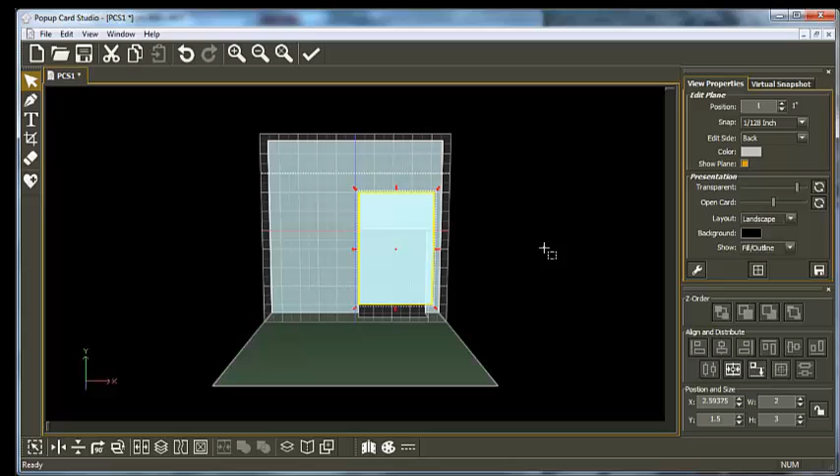Now what I want to do is give it some shaping at the top and some shaping at the bottom. So the best thing I thought to do was the trusty old brackets.

So I'm using the Times New Roman, and I'm using the bracket, which is just beside the P at the capital. And I go add.

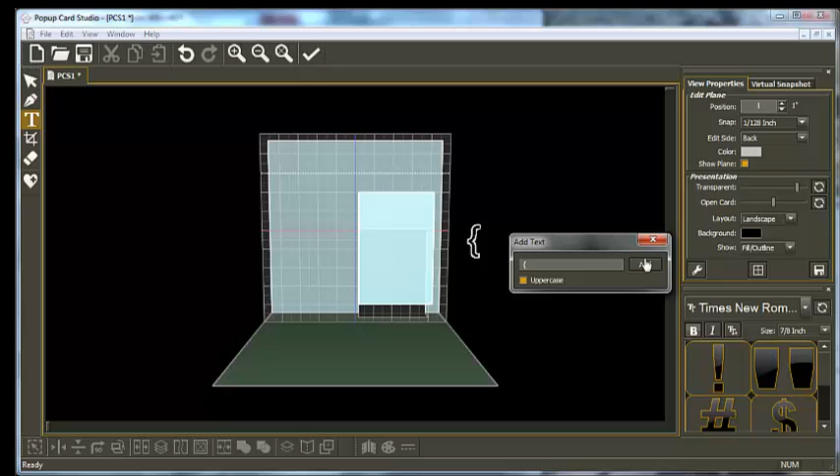Now if you see that, we'll turn that 90 degrees, and I'll make it a width of 2 inches. So it's starting to be the bottom of the chest of drawers, and say 1 inch and see what it looks like.

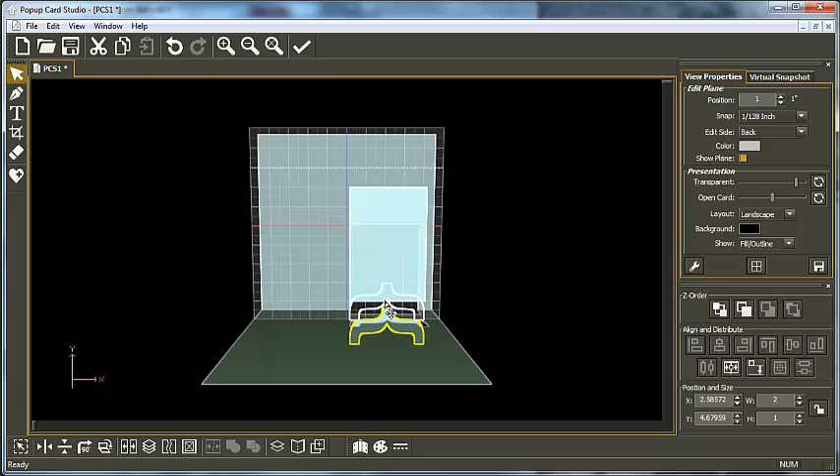And we'll see what that looks like joined onto there. It just gives it a bit of look, and I can stretch it if need be up so it hits. No, because I don't like that, because I want that shaping there.

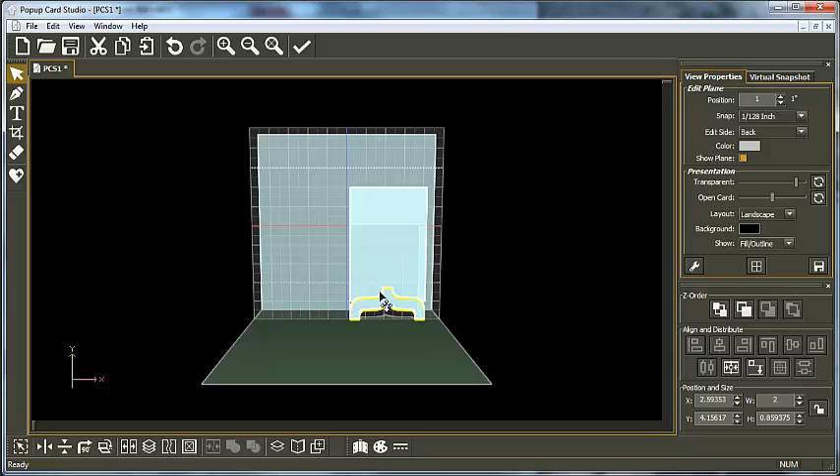Okay, and now I want to do the same sort of shaping up the top, so I'll do a copy of that and paste in place, and I'll take it up the top to give the top of the drawers the same sort of shaping as the legs.

Making the drawers is just an extra thing. Now I go over here and align them all vertically. Then I say I do a weld.

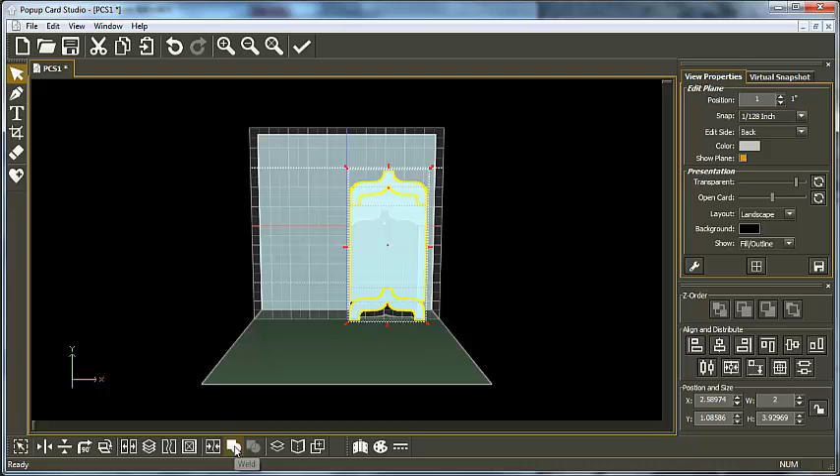So I've welded them, and I'll just get rid of this little dot here. Oh, that's not very big, so we'll go over here. Yep. So I've got rid of that little dot.

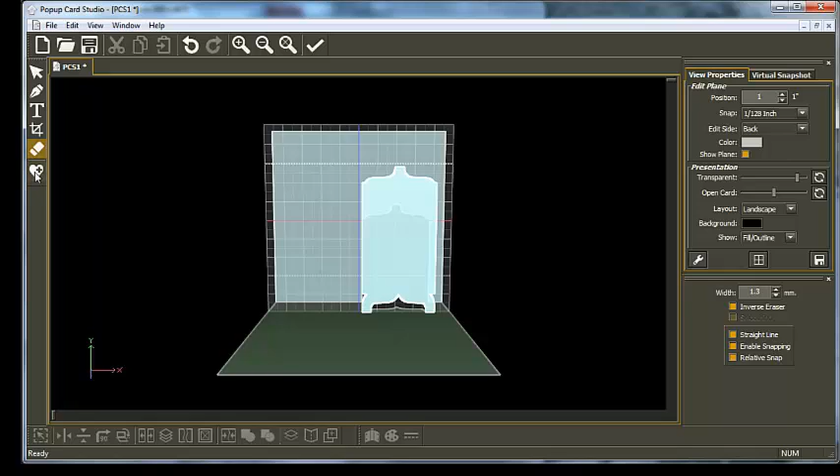So this is going to be the drawers. I won't bring in, at this point of time, the top drawers, the actual drawers, but these get cut over in Make the Cut.

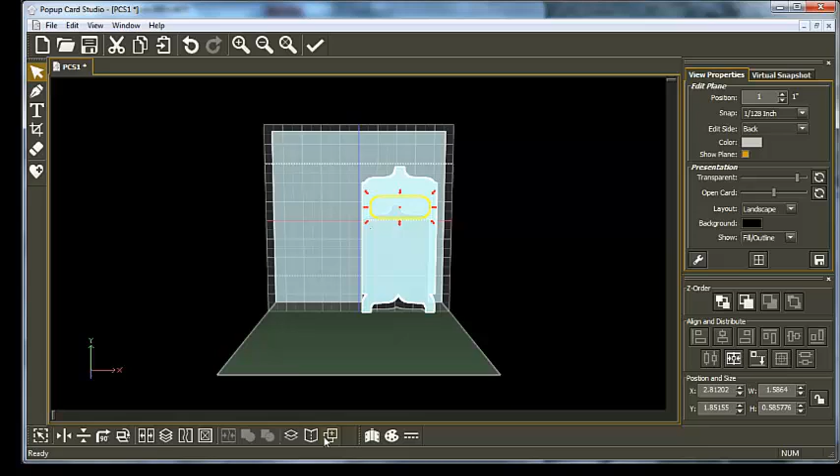I select that, rotate it 90, and I resize it to how I want, because I want 3 of them. So we go down here to duplicate, and we only want 3, and we go accept.

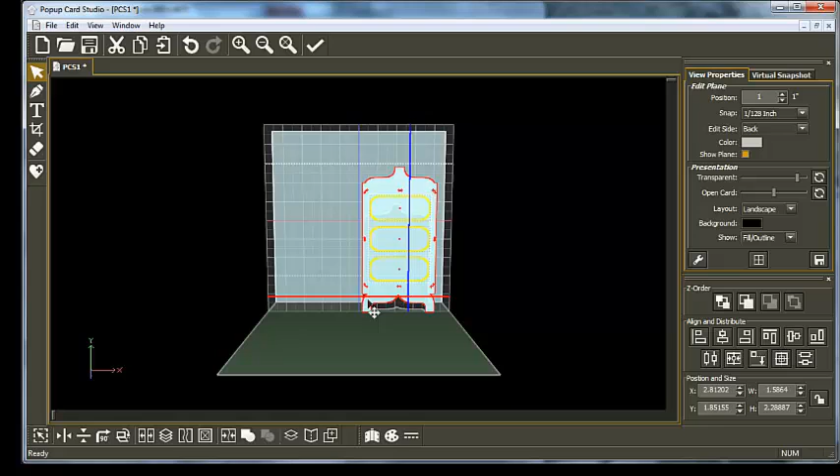And they will go over to the Make the Cut and then cut out and glued on afterwards. So first off, what we need to do is crop the bottom to make sure that those brackets are properly anchored, and we need to give a crop this side and a crop at the same angle.

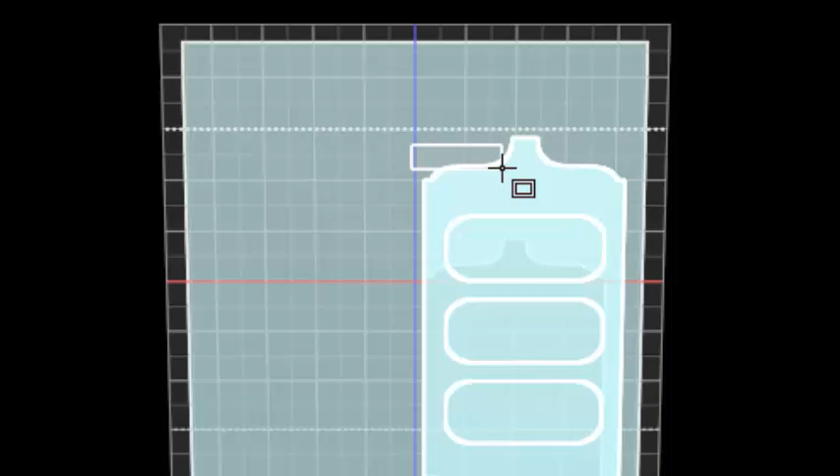You can see the dotted line has appeared, so we know it's the same on the other side. We might take that in just ever so slightly more.

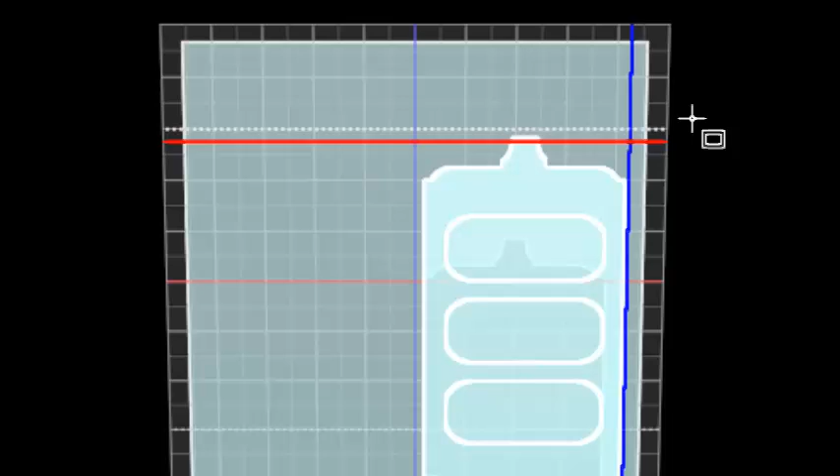It's a matter of just taking your time. Now what we do is we make sure that's down on the bottom.

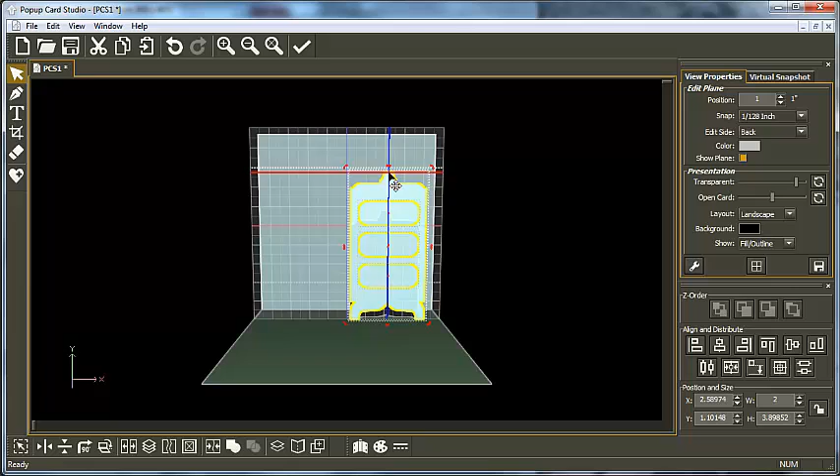Now I'm not putting this in the center because I'm going to have the baby's crib on this side. I might shrink this, so I might select all that and drop it in size. This part is purely how you feel you want it. We make sure it's on the bottom up.

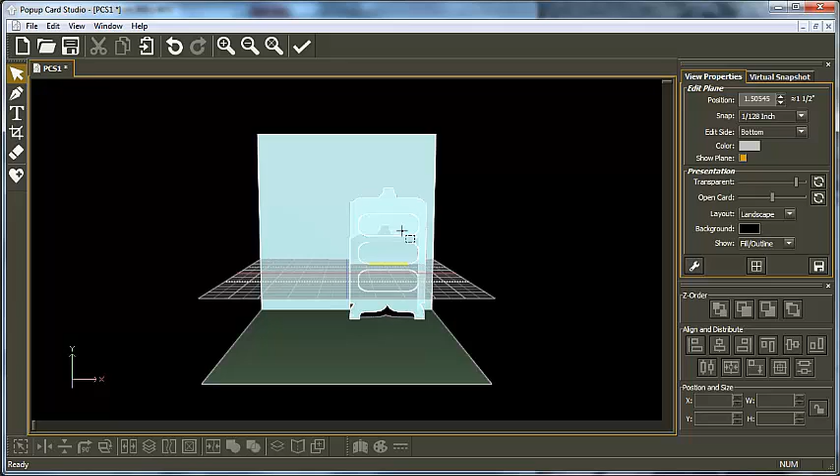We make sure the drawers are on the bottom plane, and we go to the top plane now. We use Control Shift and roll up till we get to this level here, and we give a 2-point rectangle anchor at a 1/4 inch snap, a 1/4 and 1/8 inch snapping there.

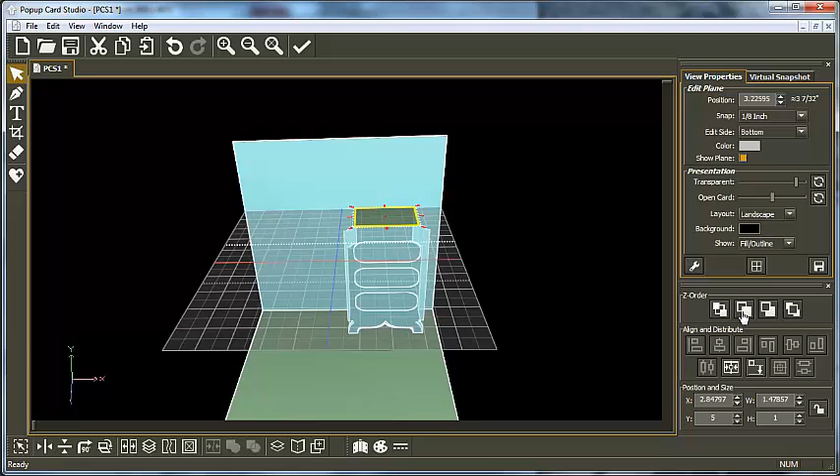And there. We've lost the top of the chest of drawers, so we just drop that down, down one, down to the bottom, and there we have it. So there we have our chest of drawers.

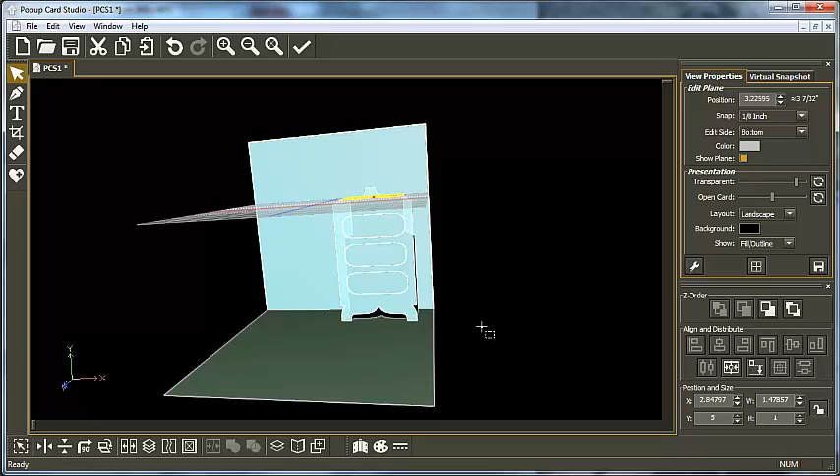Now, bear in mind that this is only the first part. This pops up as a landscape. So what we do is we select, go back to this plane, select these drawers, go copy.

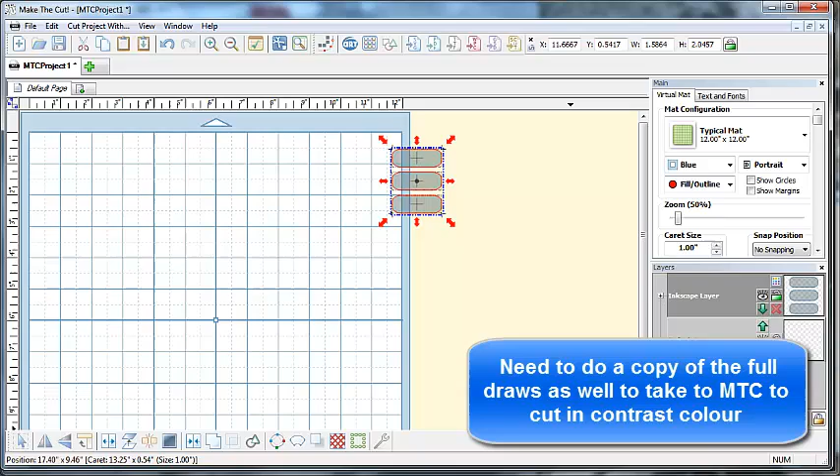We go over to Make the Cut and paste in place, so there are drawers that fit perfectly on our project. Then we go to project, export, project render, render to SVG.

And we go baby room 01.

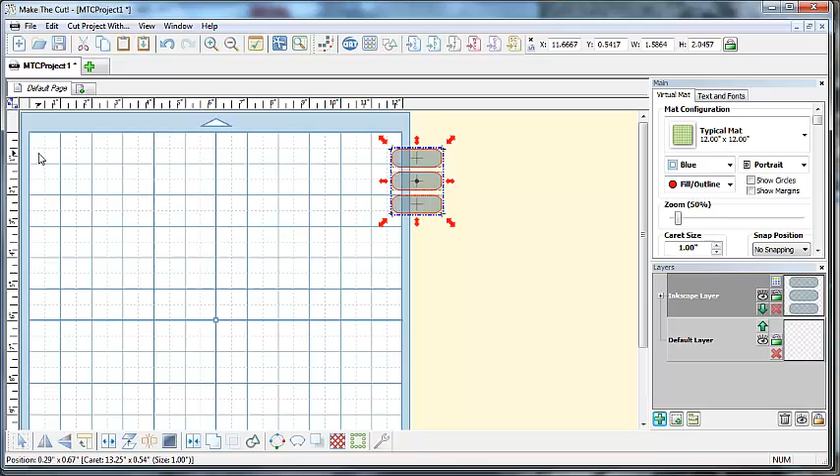So we take this now over to Make the Cut, and we go import SVG, baby room 01, and there we have the first part of our card.

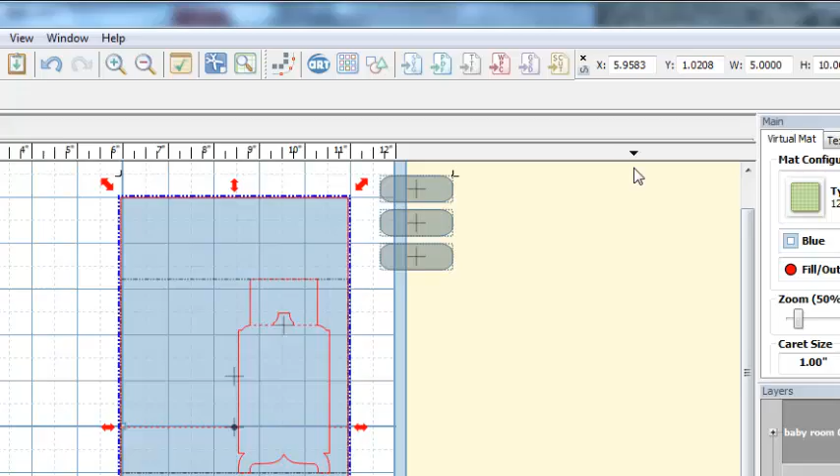Now this is going to be a bigger card. It's going to be cut on a 12 by 12. But first off, what I'm going to do is put this on a y-axis of 1 and an x-axis of 6, because I've got to bring in the next bit of the pop-up to put on this side.

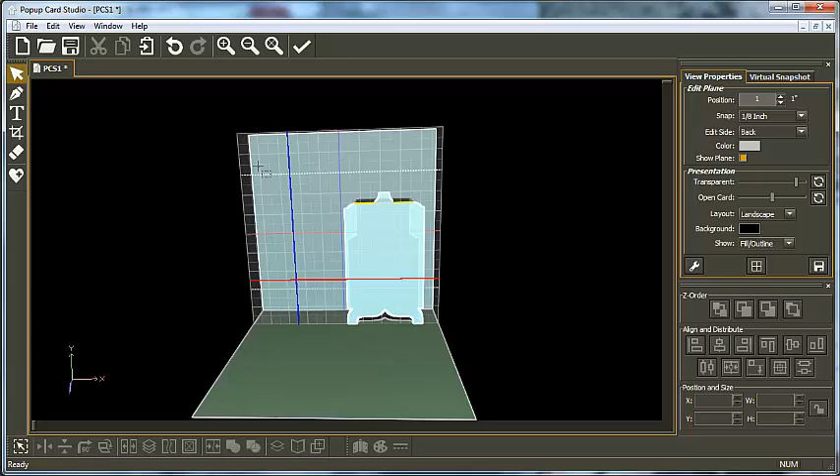Now what we do is we go over and start a new project. Now this was 5 inches by 5 inches. We want to start a new project here, 5 inches by 5 inches still.

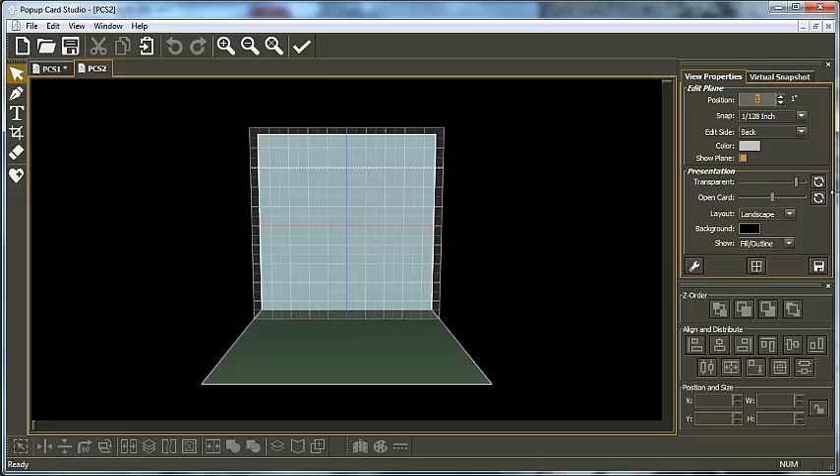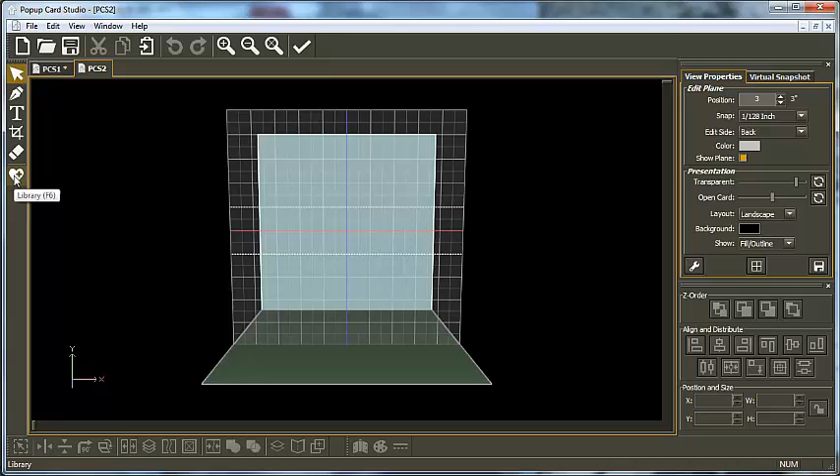And we're going to come out, say 3 inches, enter. Right, now we're going to build this, a baby's crib from here going back, so it will end up to be a portrait. I like to design as landscape because I find it easier with my arrow keys and things. So I'll show you what I'm doing, and if you like to design in portrait, you're quite welcome to.

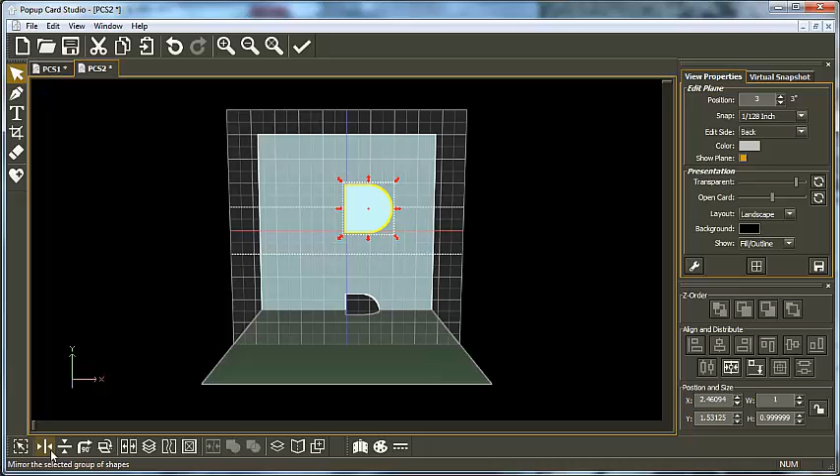Now what we'll do is, first off, we'll build the end of the crib. I get this half rounded, and I want that to be mirrored because I'm going to have it built this way. I want it 1.5 high, enter, and say I want it 1 inch. We'll see what that looks like.

Oh no, that's too high. We'll go 3 inches. 2.5. I don't like it. We'll bring it back down here because I don't like it so. Alright, say with 1.5 high and 1.5.

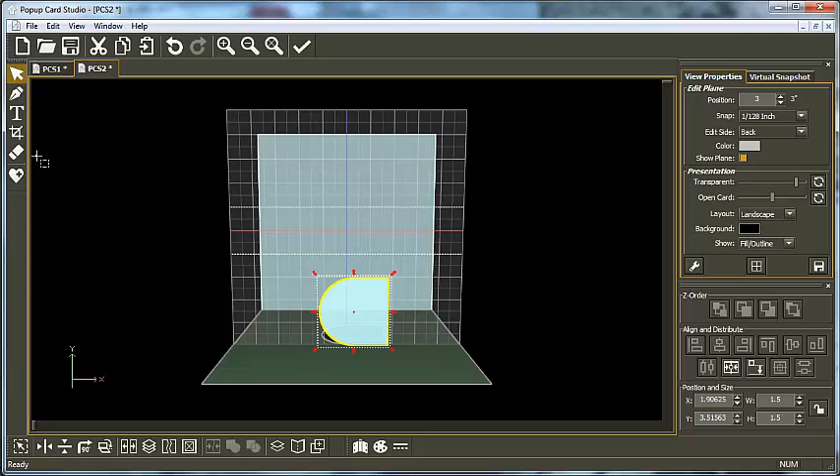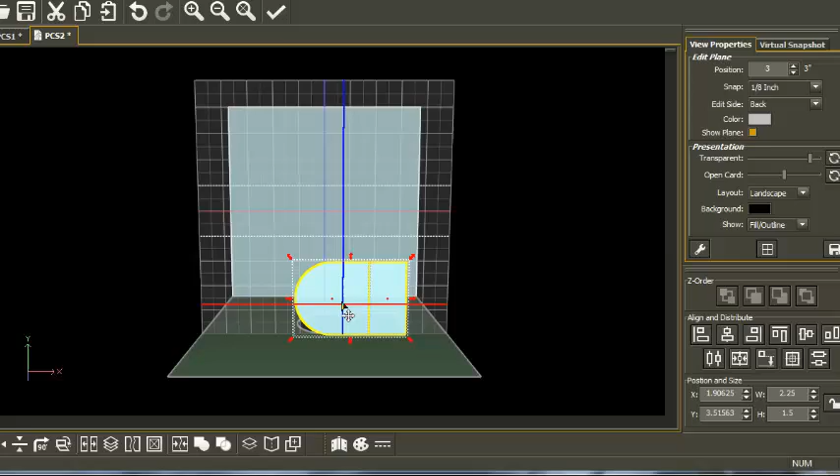And then I might just add to the bottom a 2-point rectangle, snapping of an 1/8 of an inch, and I'm just going to add a little bit on the bottom. And we weld them together. That looks better, I'm happier with that.

And we aren't going past this 2-inch mark because this 2-inch mark is where the two cards are going to be joined. So we put that on the bottom plane.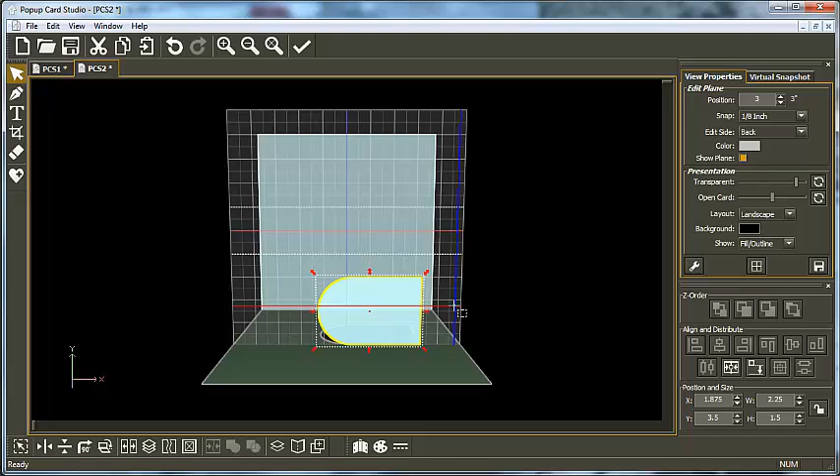We've got to give this some legs, so I bring in another shape for the legs, and I want to bring in this one here to give it some shaping.

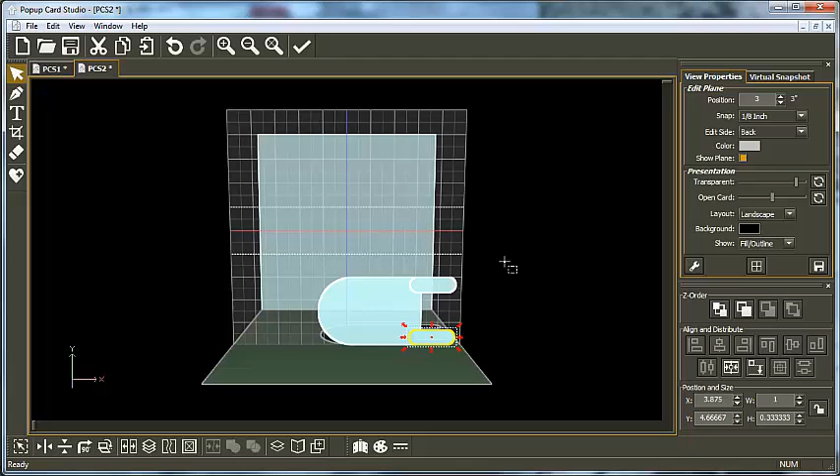Now, I want to do 2 of them, so I copy, paste, and I put another one on this side, and I make sure that they're lined up this way, vertical center. And now what I do is I weld all of them together.

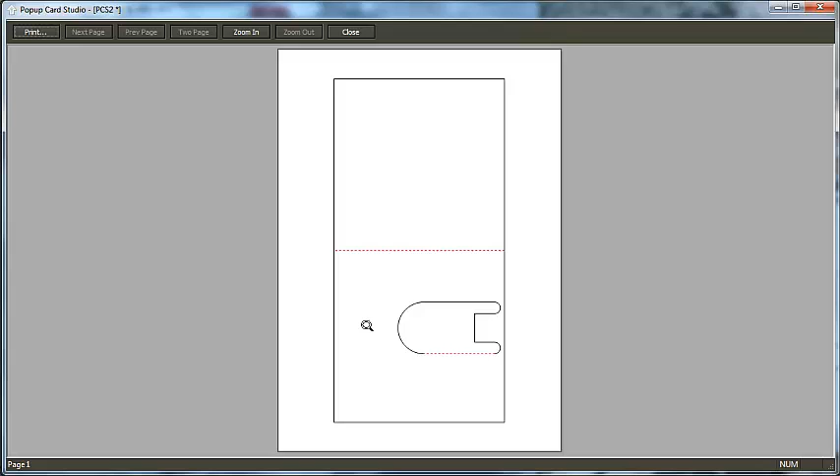Do a weld. Now I want to check that the print preview is working, that I've got this, so the dotted lines are down here, so it's now connected to the line, to the side of the card.

Now I'm just going to do a plain solid end on my crib, but you can do whatever end you want. Now I use the space bar and get to this plane here, and I build the cagey part of the crib.

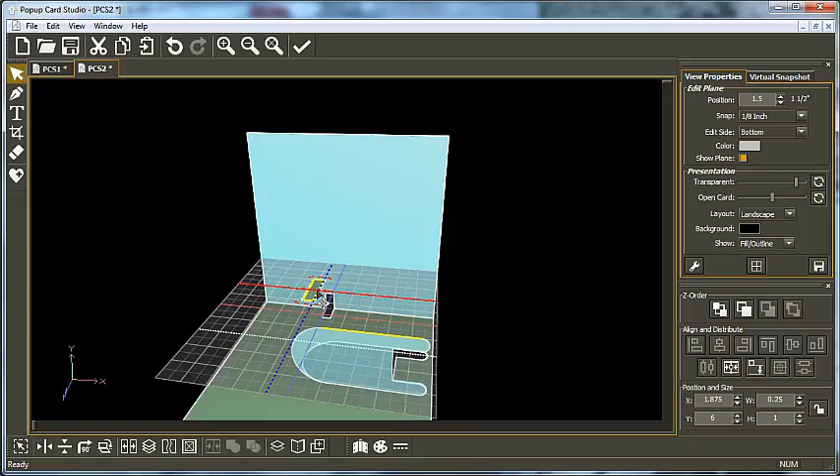I bring in this, and what we'll do is, say we want that, we'll build it sideways then, so we'll turn this 90 degrees.

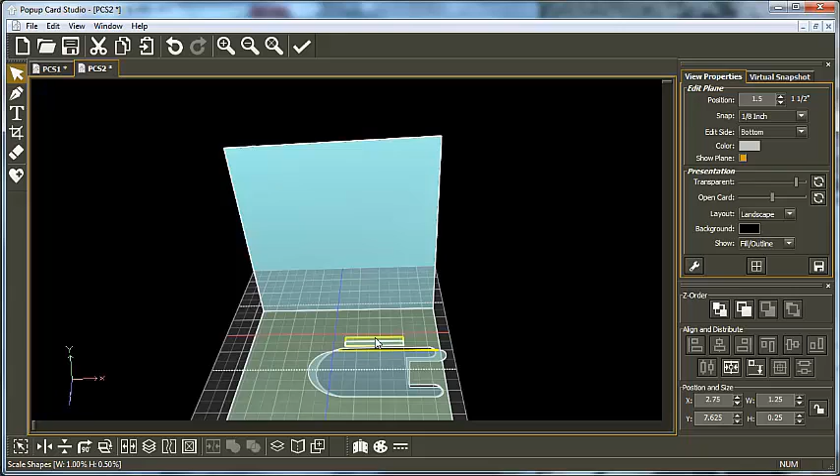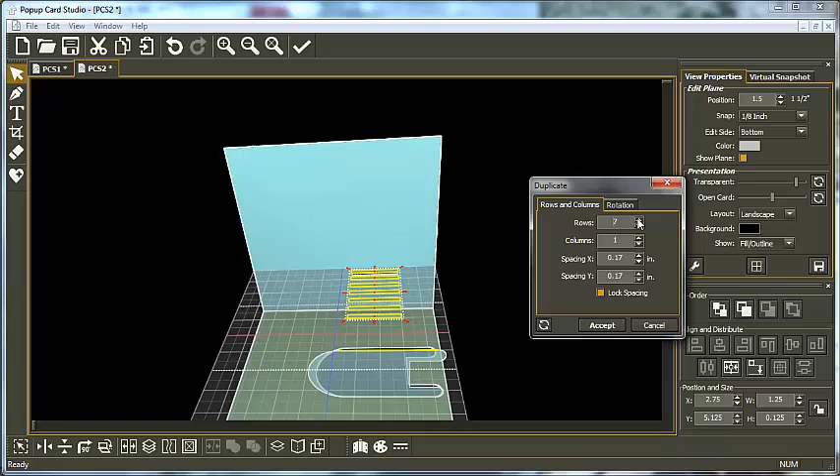Maybe a bit narrower. We don't want the baby's heads to be able to be poked through though, that's the thing. And we do a duplicate of that, duplicate, and what do we want? We want say about 7. We might have a bit more spacing, and we take it down 1. Okay, then we go accept.

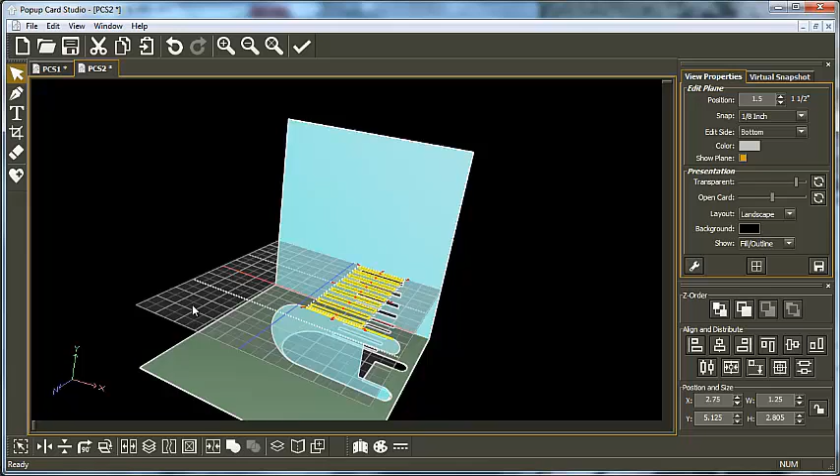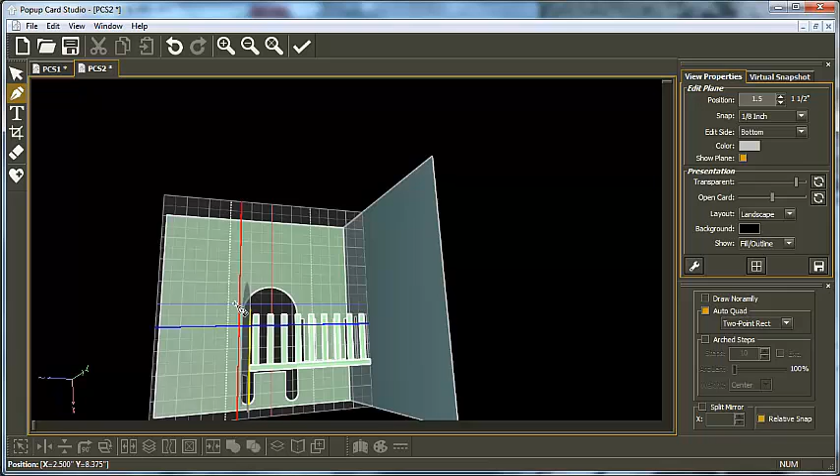So now we have what's looking like the sides of the cage part of the crib. Then what I need to do is give myself a 2-point rec on this side to this side, and the same up the top, a 2-point rec here to a 2-point rec there. Oh, that might have been a bit too much. Might make this one just ever so slightly smaller, so we just bring that in a bit, and we'll just bring it down a bit.

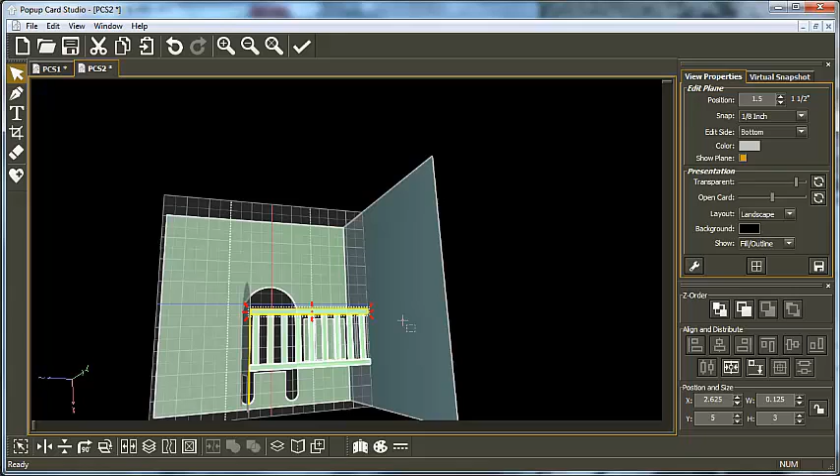Now, with all them, I want to now select them and do a weld. And we'll check the print preview. And we have the score lines here and the score lines there. So that is looking like the crib.

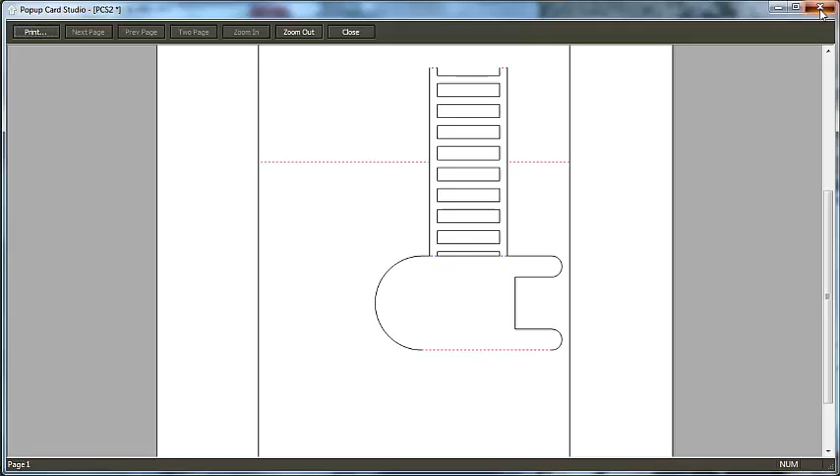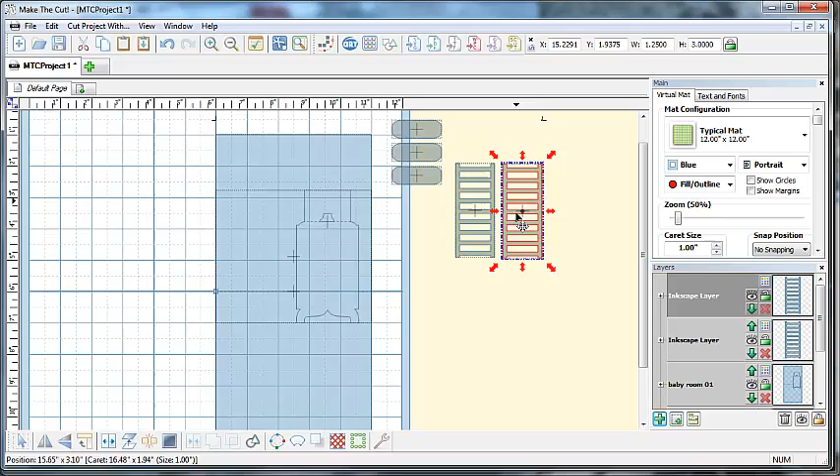So what I do now is I take a copy of that, over to make the cut, do a paste in place, and I want 2 of them. So I do another paste in place. Now I want 2 of them because I want one for the back of the crib and one for the front of the crib. And I hit my panic button, which I call this my panic button, and I hold the D key down, select this one.

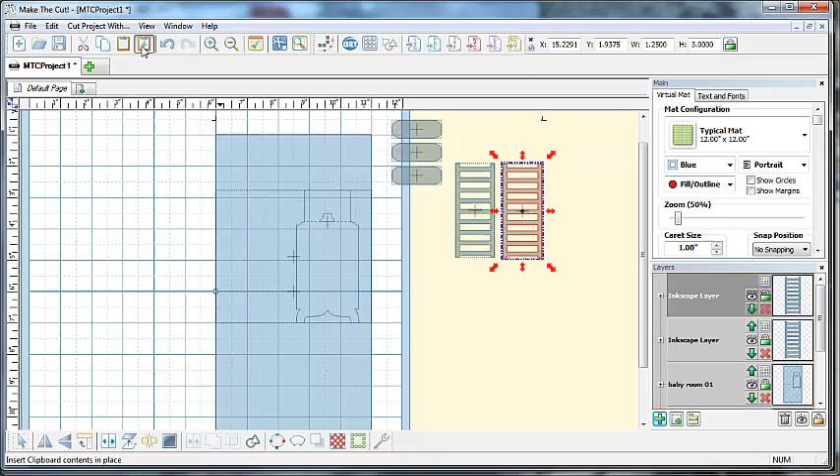I do a copy of that, take it over to make the cut, do a paste in place and a paste in place. So I've got 2 of them, one for each end of the crib. Even though our pattern has only one end, we're going to cut one of these out and put in behind here on the actual card backing.

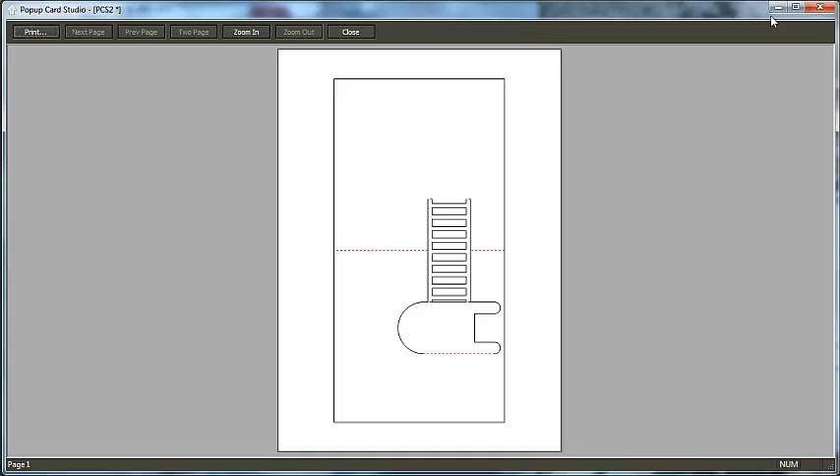So now what we do is we'll do one more quick print preview. That's perfect. And we go render, export, project render, rendered SVG, and we'll call this baby room 2.

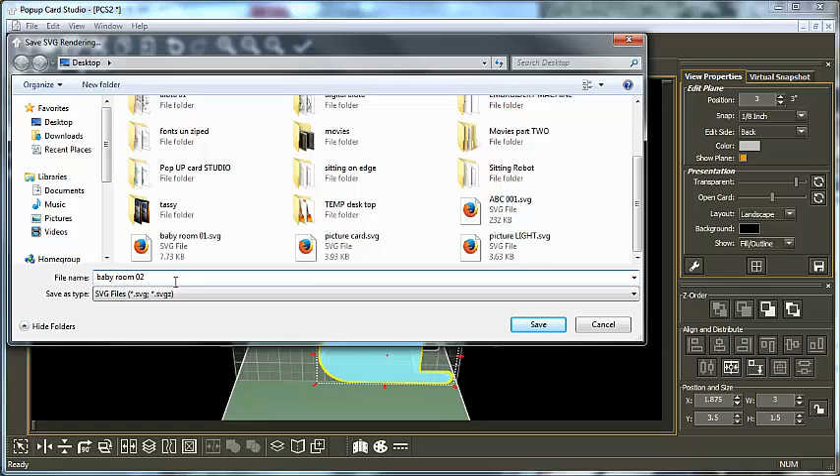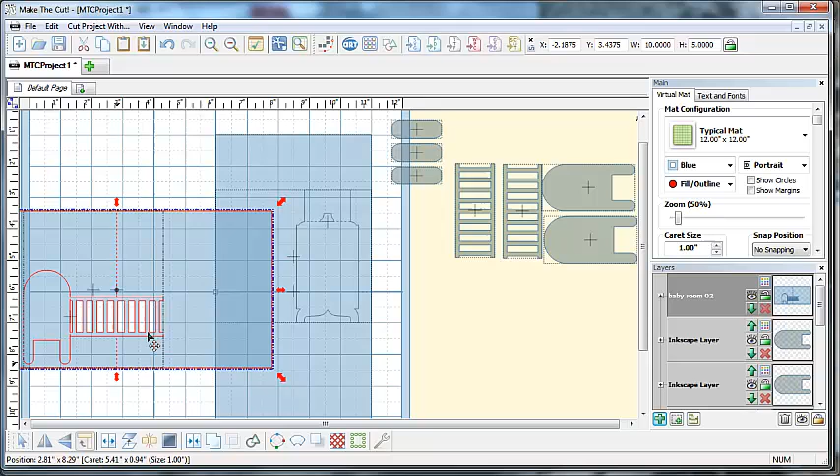Enter. Then what we do is we go over to make the cut and we bring in that SVG. Bring in the SVG, baby 2, turn 90 degrees, and we line this up.

Now the reason I did it as a 5x5 card is if I line this one up on the 1-inch X plane and the 1-inch Y plane, I know that this center is dead center in the where the other card begins.

Now the fun begins. This becomes a pop-up that goes this way in, and this becomes a pop-up that goes that way up. Now, what you have to do is just one little bit more tweaking here. So is this one. If you try to fold them both the same way, both different directions, they're going to intrude on each other.

So what we've got to do is we've got to take the 2 inches from this side of the card, just here, and put this direction, and we leave the 3 inches on this side of the card there. So what I'm going to do...

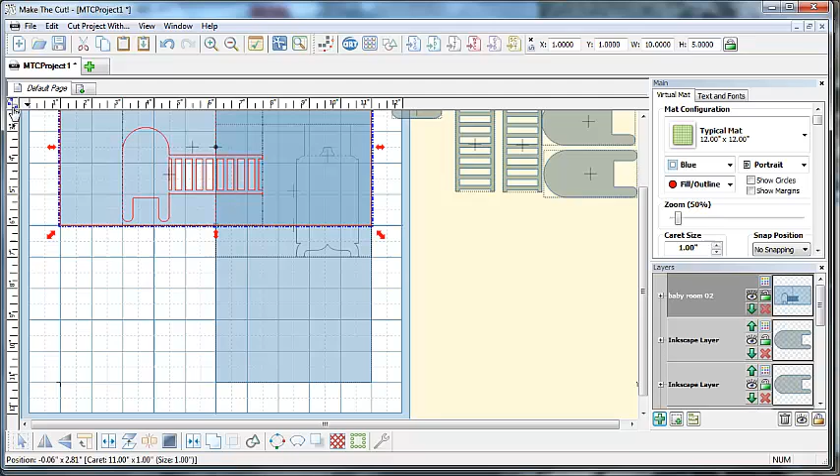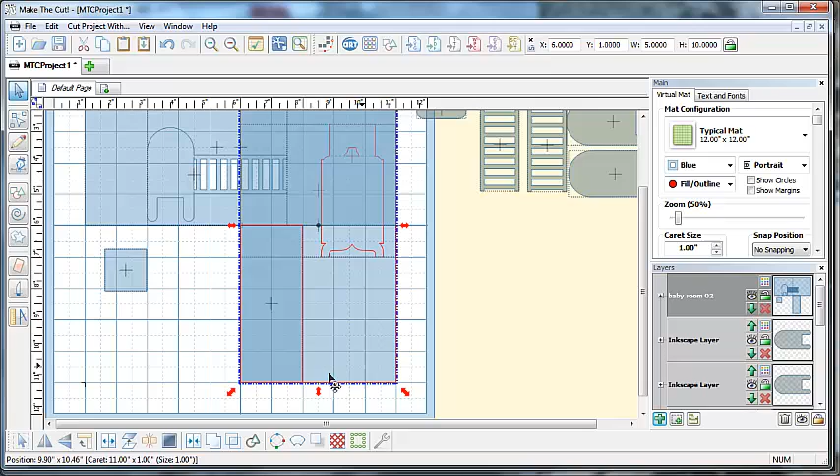is I'm going to go and bring in a square and I'm going to bring in a second one. Now, first off, this one is going to be a height of 5 inches high by 2 inches wide, and we want that on an x-axis of 6 and a y-axis of 1. We're going to select that plus this one and do a Boolean join.

We don't want that one, we want that one. So it's taken away that section that we're going to put over this side, and we go apply. Cancel that for the moment.

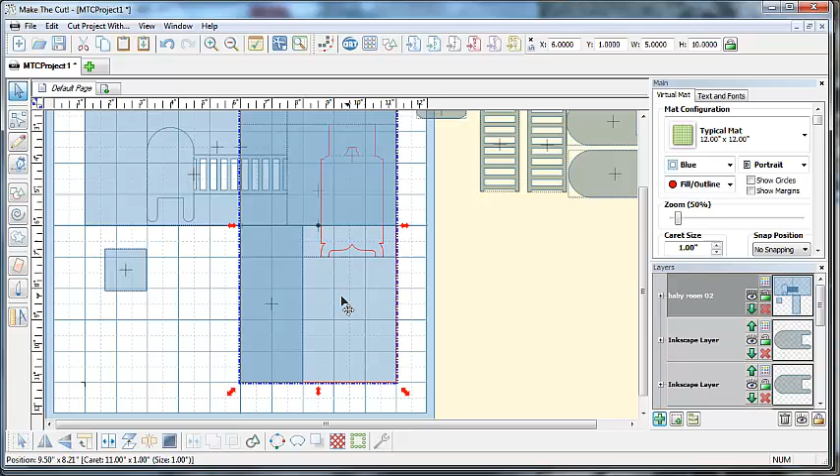We take this, we do a break apart, then we do the same thing. The reason we did break apart is because this goes crazy here. So we do that again. We go a Boolean join, and we do a difference of B, and we go apply.

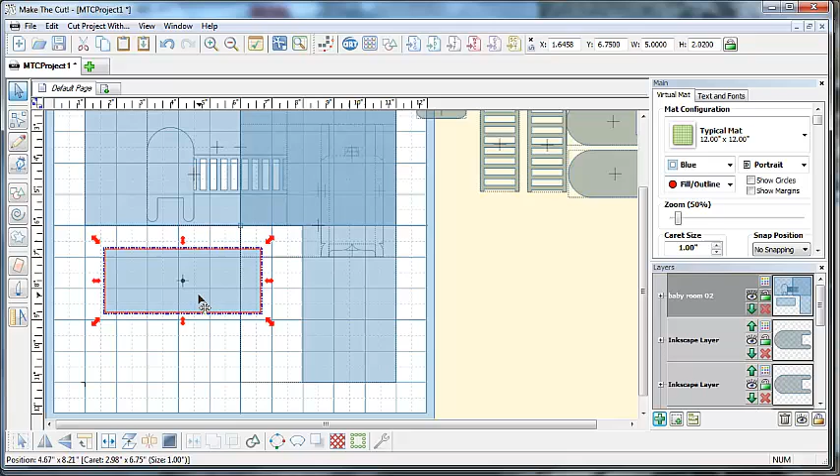Then what we do is we take this one and we do a width of 5 and a height of 2. And I'm going to do 2.02, enter, because what I want to do is have it just overlapping there.

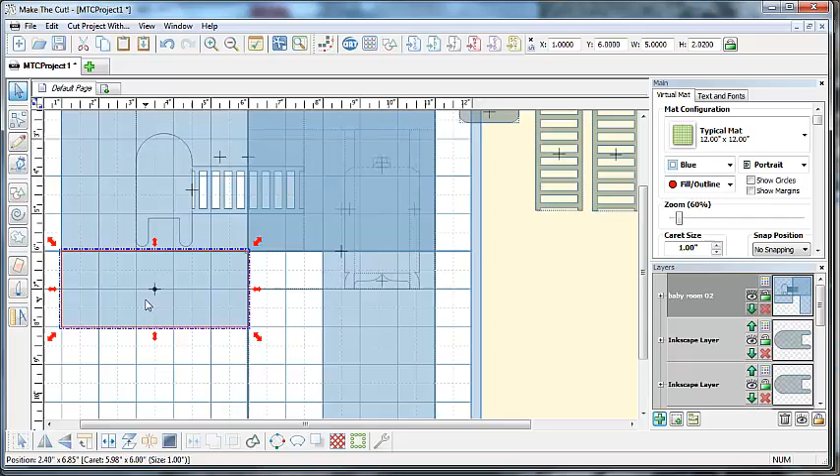We want it on an axis, y-axis of 1 and 6, and I'll just zoom in here, and I will just tweak that with my arrow keys up so it's now overlapping this one here.

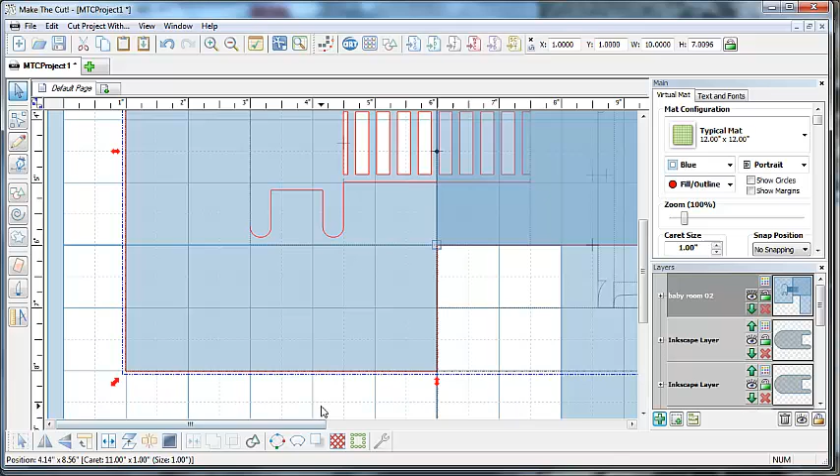So I take this one and do a weld. Now you see the starts of a card. We take this one and do that break apart.

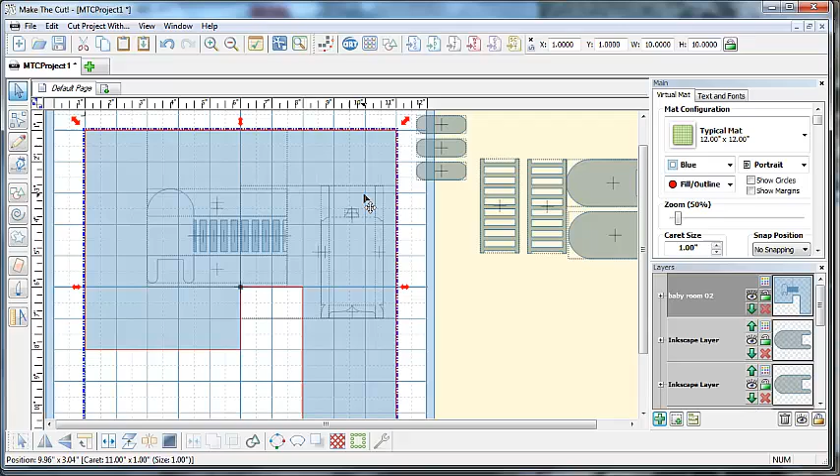And now we take just the outside of this card, holding the shift key down, take the outside of that card and do a weld. So here is very much the start of our card. This will now be folded up there, then this gets folded in, and this gets tucked under the bottom, which now your card will look like this when cut, and when it's folded, this edge of the card will fold up, and then this edge of the card will fold in, and this 2-inch card here will then tuck around the back to make it a sealed card.

And then when it opens, here's your full floor of the card, and you've got the full corner view of your pop-up. One pop-up going this way and one pop-up going that way.

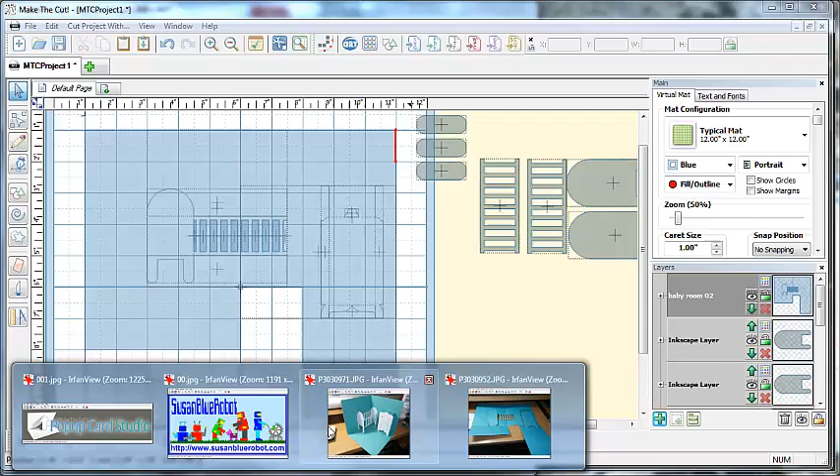Decorate it. This is the pieces that we brought over to cut here. Here's your drawer pieces, so they're all for decoration later. You can go ahead and put all your score lines. Oh, you've got to make a score line for across here. This one here, across here, because that needs a score line. So other than that, you cut your card out.

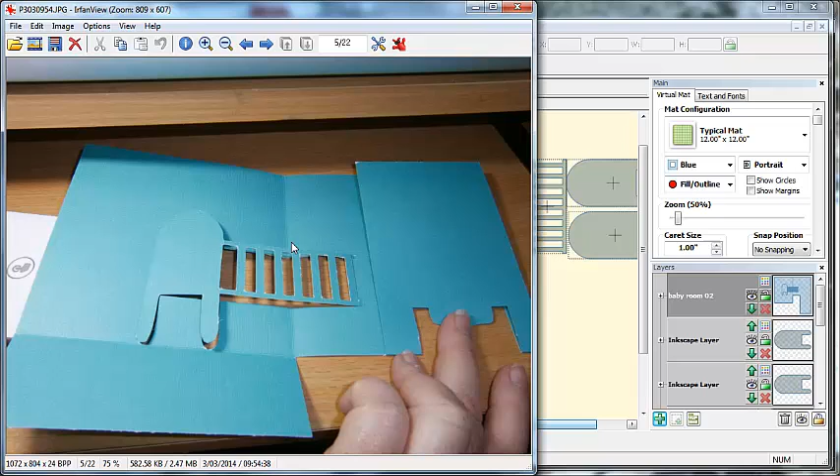And you fold it. This one gets folded that way, so it folds down there. So this one always gets folded first, because then this goes longer than your chest of drawers, and that gets folded, and that gets folded up, and there you have your card.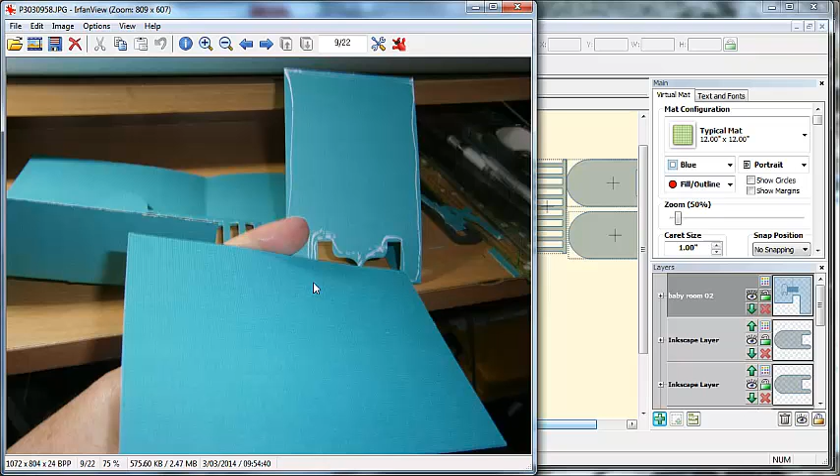Now, the best way I found to do this is I cut, instead of putting it in a folded card, I cut a card that is 5 inches by 5 inches for the back of this card, a 5-inch square by 5-inch square for this bit here, and then a 2-inch by 5-inch for this square here, and a 3-inch by 5-inch for this square here.

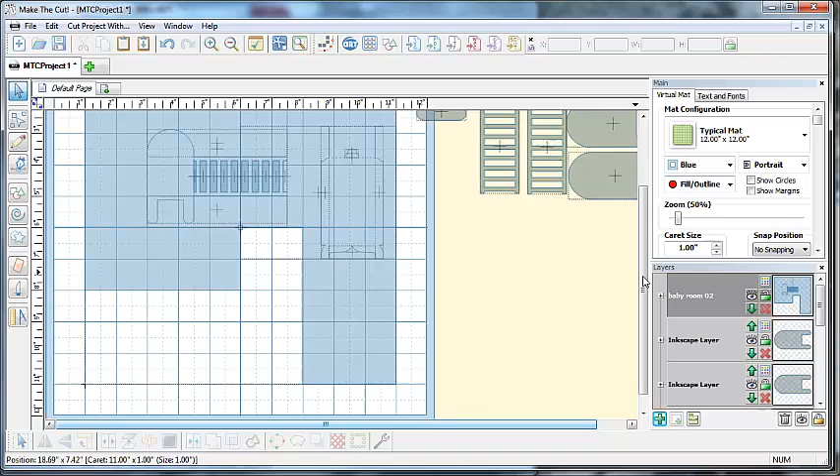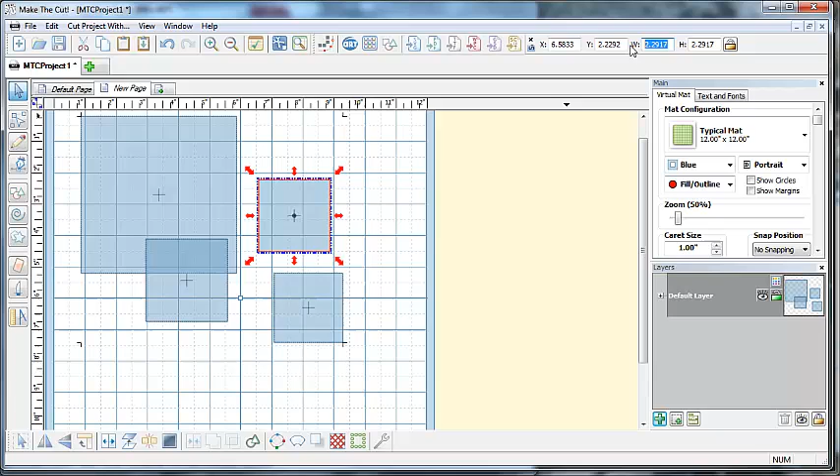So we'll just do that. We want a new thing, and we'll bring in 2, 3, 4. So this one becomes 5 inches by 5 inches, and that's for one side of the card, the outside part of the card. This is 5 inches by 5 inches, and that becomes the other side. So we cut one of them, and we glue that on.

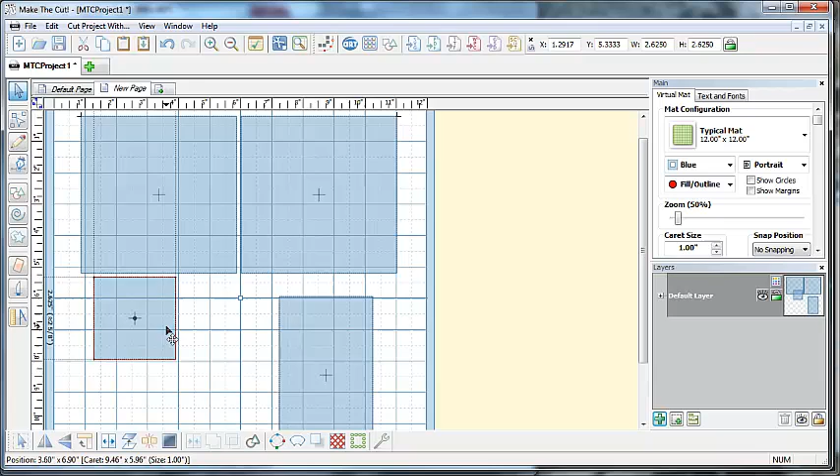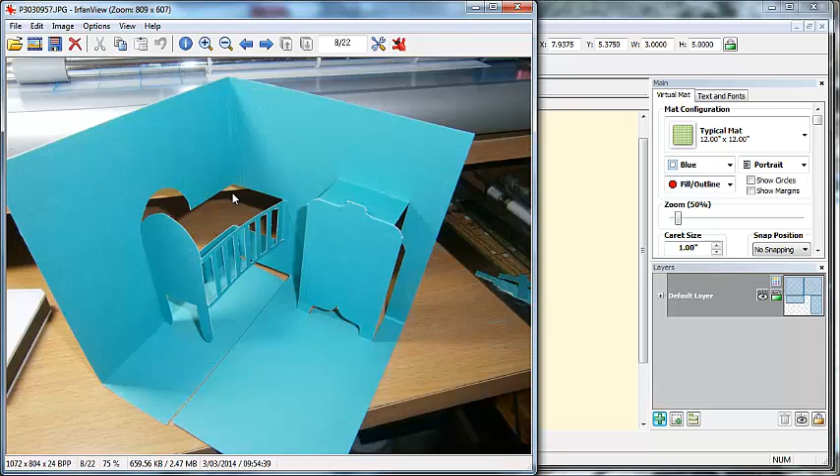Now this one becomes 5 inches high by 3 inches wide, and this one becomes 5 inches wide by 2 inches high. Now these are all the pieces that I cut for the outside of my card, and I need the pieces on the outside of the card because when I cut, I have all these bits and I won't have any room. I haven't got any room to put the back of the cradle in properly.

So I glue the pieces in place. I glue that on there. I glue the piece onto this bottom bit, and it also gives it a heaviness, a weight, so the bottom of the floor will sit down nice and neatly. Then I put a piece, my 5 by 5 piece, onto there.

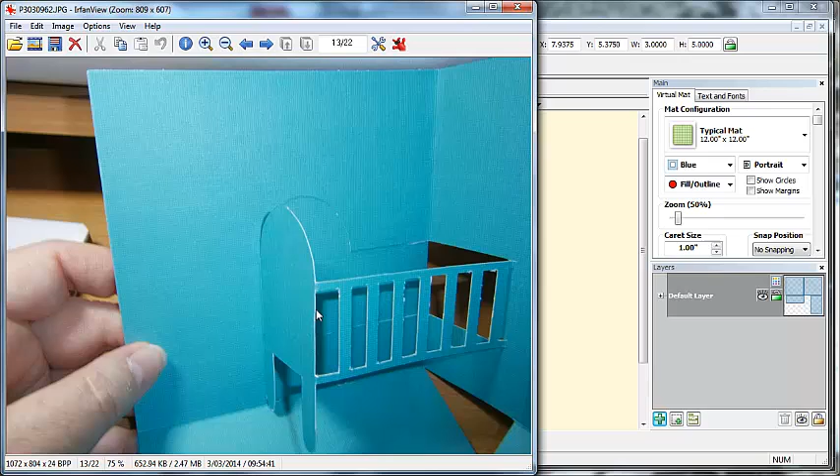So I have this. I need just one more piece on the back here, and as you can see, the cradle's cut out, but now using the same colour you can't really see that, so I will put the contrasting colour at the back there. I put the next one on, and there I have my little room as a start.

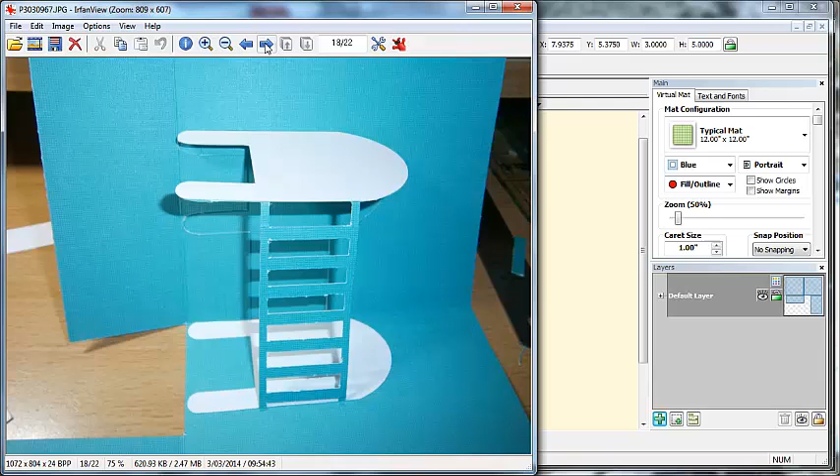I cut all my pieces out of a contrasting colour, and I start adding them in to the back of the cradle, so that looks like that. Then I put my fence around it, and then one on the back as well. So that looks like the cradle.

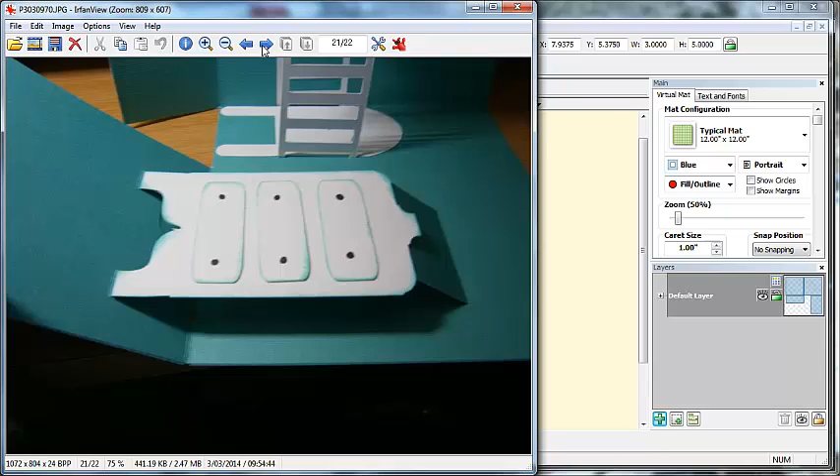Please excuse the cardstock I used, but this is the 9th tryout that I cut for this one. And then I decorate my front of my chest of drawers, and there I have my card all finished.

And you can decorate it, add little toys, add little pictures on the wall, add nice wallpaper. It's entirely up to you, but at least at the start, and I'd love to see what you come up with, a pop-up this way and a pop-up that way in the one card.